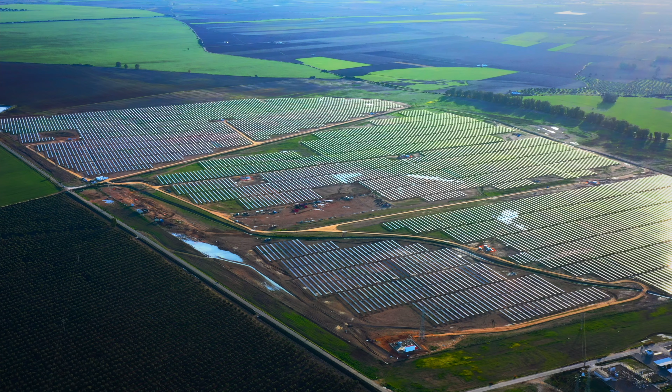Transition to a green, sustainable future is a new trend of the 21st century. We've set the goal in 2030 to reduce greenhouse gas emissions by at least 55%. According to the European Green Deal, Europe aims to become carbon neutral in 2050. We aim to have CO2 emissions peak before 2030 and achieve carbon neutrality before 2060.

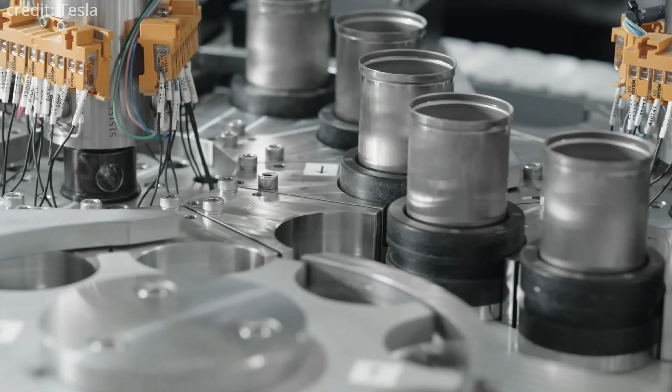The transition to renewable energy will require lots of different metals. The pressure on the mining industry will multiply. And Sweden, as a leader in mining in Europe, takes steps to make the industry more efficient.

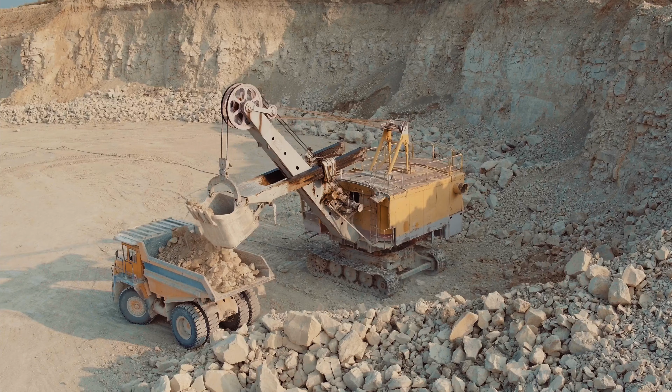The mining industry needs to be more productive, and we are outlining an organization that can help to test and develop new mining-related technologies. Mats Johansson is the leader of the mining development project called SMIG. The project is financed by the Swedish government agency Vinnova, through PIIA and Swedish Mining Innovation and mining-related companies, aiming to increase mining productivity and safety.

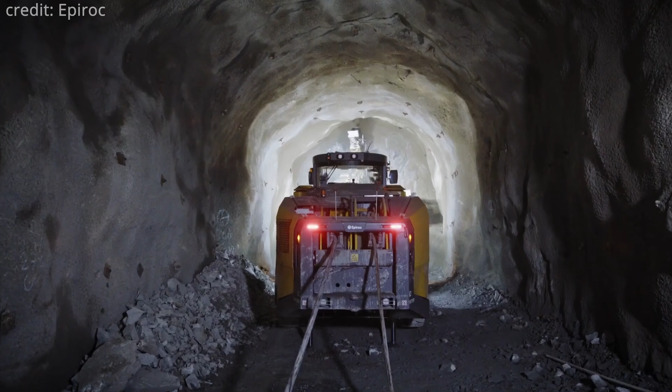This partnership is profitable for all actors in the industry. The universities get access to resources to speed up their research. SMEs can commercialize innovations easier. OEM suppliers can easier get new solutions to the market. And mining companies can early utilize innovations in order to achieve a fully automated mining operation.

This collaboration reduces risks and testing costs, and the Swedish government potentially gets more taxes and a more efficient industry with new jobs. Founded in 2019, the SMIG project has already helped several mining-related companies, IT companies, and universities. And we have also studied how the project can support various players to work together based on several use cases.

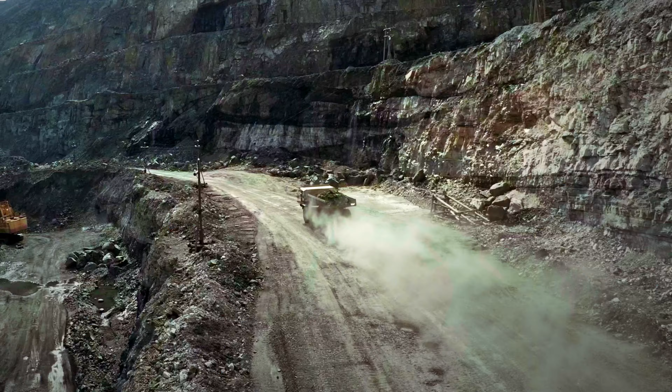Thanks to its large reserves of natural resources and world-class innovation policy, Sweden is a world leader in the mining industry. But the development and testing of new technologies can be a difficult task, even in Sweden, especially for small companies and academic teams. If you want to be a supplier to the mining industry, your customers need to know that your technology is actually working.

And to be able to do that, you need to test and demonstrate that technology. But if you are a smaller actor, like an SME, an academic team, or an actor completely new to mining, you have a hard time getting access to operational sites.

One of the goals of the SMIG project was to analyze the potential of a central test and demo organization and determine the role it can play as a testing facilitator to accelerate innovation in the industry.

We have mapped over 150 actors related to test and demo in Sweden. And this decentralized network of different actors makes it really hard for smaller and new players to navigate the infrastructure for test and demo to find the best suitable solution for the TRL acceleration needed for their innovation.

This is why SMIG as an organization is so important as a single point of contact for various actors, simplifying the complete processes for test and demo.

The next step was to understand how the project would get financing. Factors of risk and success were analyzed, and different benchmark cases were studied. What we have learned is that SMIG and similar organizations have a really hard time operating solely on a commercial basis, because these test sites and also the actors that need to perform the tests have very small budgets.

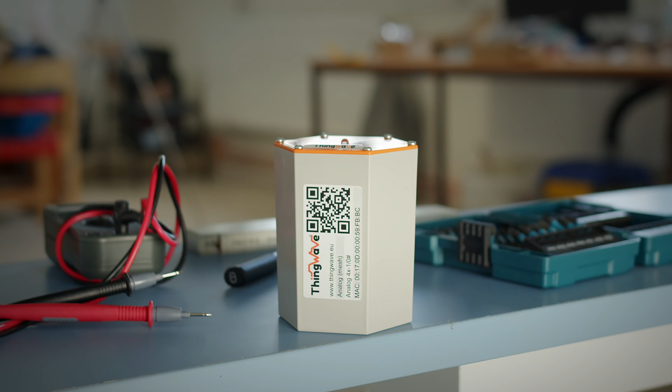It's based on IoT solutions, where we put very small and low-cost wireless devices with different types of sensors, and then we can measure anomalies and alert the mining companies about pending danger.

Since we work with sensors, we need access to real mines in order to do field tests. Before SMIG, we had to run around and speak with different mining companies, but during the SMIG project we got much easier access and could start doing a lot more field testing to test our new technologies.

ThingWave has been leading the use case digitalized ground support, aiming to develop new solutions for ground support monitoring. Together with data analytics from Uppsala University and experts in rock mechanics from Boliden AB, the ThingWave team has improved its technologies and measurement performance.

In this collaboration, we managed to create a couple of different results. One result was regarding fallen ground detection, which we worked on together with Uppsala University. We sent them data that we collected together with Boliden in the Kristineberg mine, and they were able to write algorithms that can detect even small events happening close by smart rock bolts. This is one important result from the use case.

Another result is that now we can detect different properties from rock bolts, including strain and elongation, breakage, and microseismic activity. We also worked a lot on data integration.

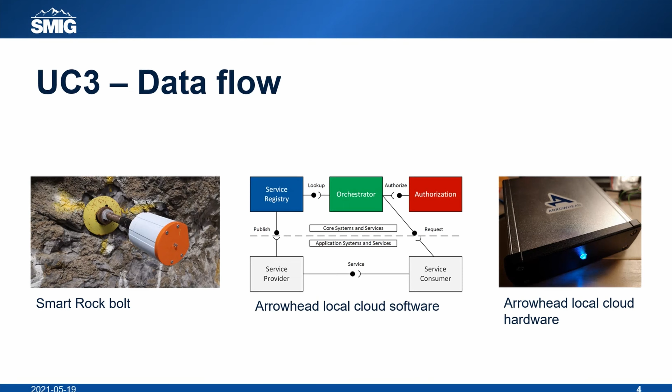We created software systems for the Arrowhead framework, where we can both send and receive sensor data using an Arrowhead local cloud. The SMIG project has helped us get quick and easy access to mines so we can perform field testing.

Which for us is very important since we work with hardware. We were also able to meet new people and companies that we can work with, and it's been a great pleasure to work with SMIG with all these great people.

New sensors and technologies generate data, and it must be handled by existing industrial systems. To achieve information exchange between participants, Benerit was invited to the SMIG project.

Hello, my name is Hans Forsberg. I work at Benerit, and have been working there for about 20 years. The company is stationed in Luleå and has about 35 employees, working mainly with software development.

Benerit is a company that works with other companies, and SMIG was a great opportunity to get new companies to work with and help them with integration problems.

In the SMIG project, Benerit worked with the Arrowhead framework, an integration platform that simplifies information exchange processes. The company also used its software, Arrowhead Test Tool, to verify each integration.

Together with use case 3, we actually did a proof of concept where we showed how the information from the rock bolts has been integrated into Benerit's test tool.

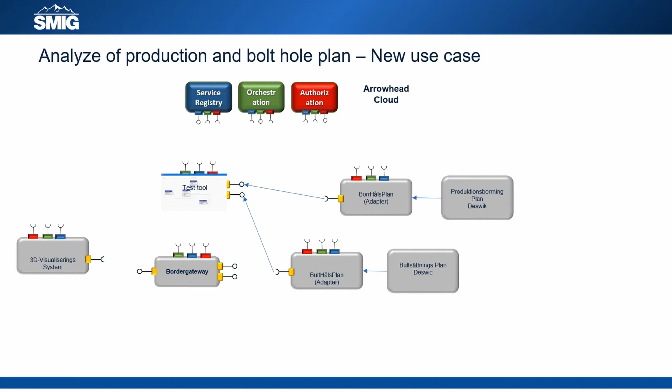The other achievement for us is that we actually have the opportunity to work with our test tool, which is a platform for verifying system of systems.

I'm very grateful for the collaboration in the project, and I think we have achieved a lot of things working with other partners, and hopefully we will continue to work with these partners after this project.

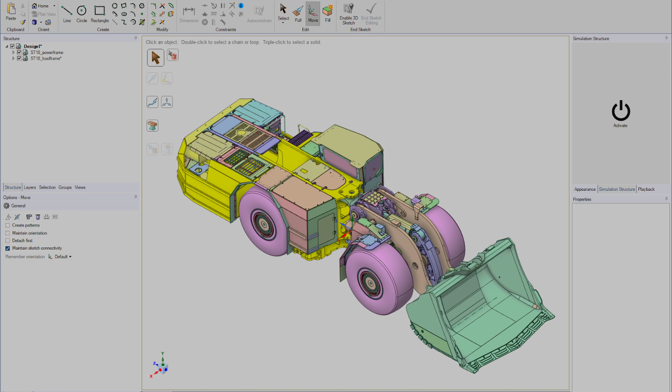Underground mining is a challenging process, and it can be dangerous for workers. To make the industry safer, mining companies are planning to reduce the amount of underground personnel, including drivers of the vehicles. Algoryx Simulation, a participant of the SMIG project, works towards the goal of making the underground fleet fully autonomous. My name is Martin, and I work as an R&D engineer at Algoryx Simulation here in beautiful Umeå.

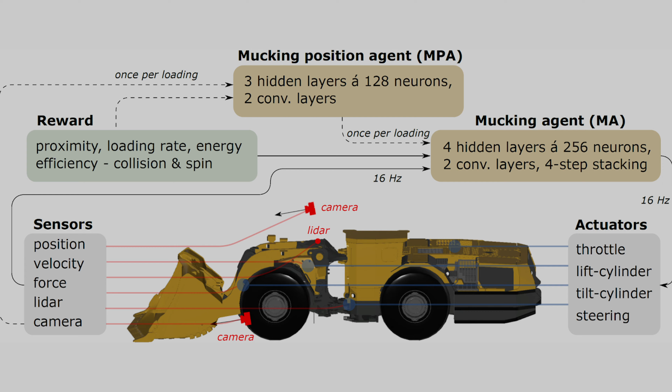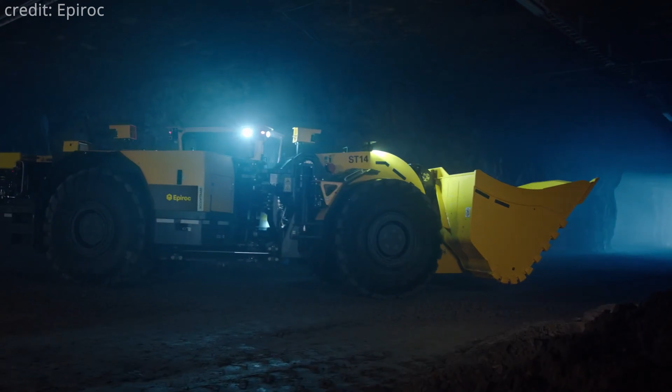Developing autonomous systems and training them using simulations will be a big part of the future. Our simulations can be used to train machine learning algorithms, but we require help from other companies to actually implement this on real vehicles and do the verification and testing. The SMIG project has given us that opportunity to work with companies who work with real vehicles. During the project, the Algoryx team intended to work with Boliden and Epiroc to develop machine learning algorithms, train them into a simulation, and apply this technology in a real mining vehicle.

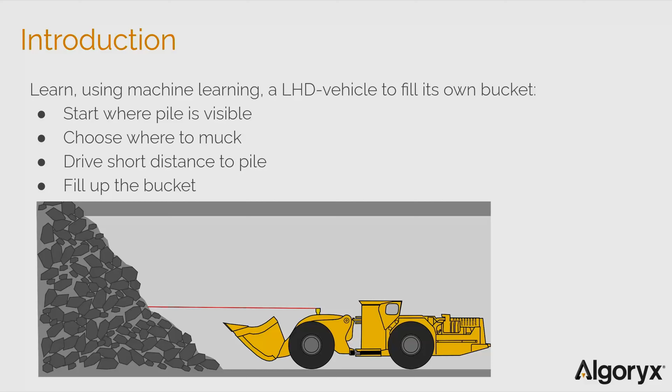But because of the pandemic situation, we had to concentrate our work on the software part. We were able to make a proof of concept implementation of a machine learning algorithm on a wheel loader loading cycle, which is the main result of our part in the project. We have also developed a framework and a workflow for continuing and developing these machine learning algorithms for other vehicles as well and other applications. So that's what we hope to do in the future.

The SMIG project has allowed us to further understand mining operations and vehicles and allowed us to work with great companies. It has also been a way of getting to know the mining industry better, and also getting to know what it's like to work in a big project like this with many different participants, experts in their own areas, all contributing something. It's been a great experience.

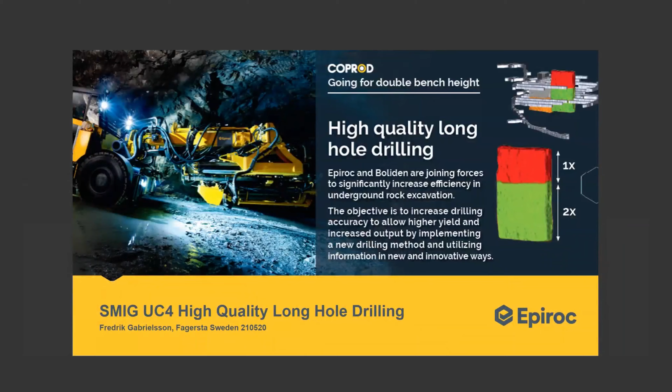To fulfill the demand for metals and minerals, the mining industry has to become more efficient. And the high-quality long-hole drilling use case has already made a significant leap towards that goal. My name is Fredrik Gabrielsson. I represent Epiroc, the Tools and Attachment Division, where I hold the position as Marketing Manager Digitalization. Our headquarters is based in Fagersta, which is in the heart of Bergslagen, the cradle of Swedish industry, and also home to some of the oldest mines in Sweden.

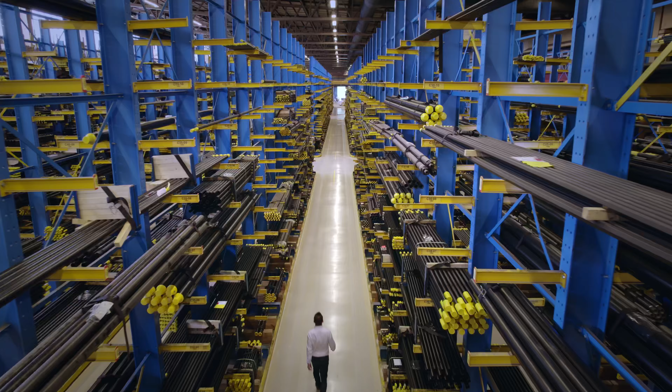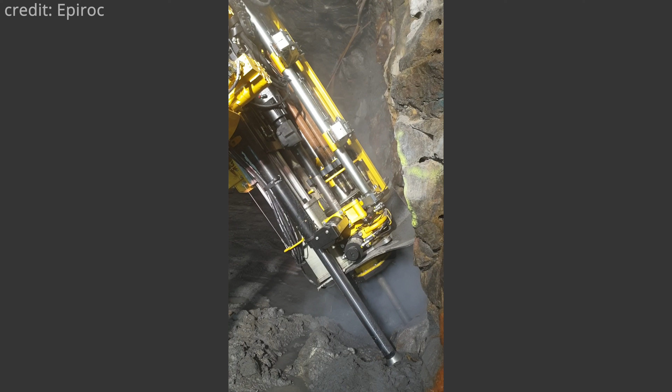I was responsible for the use case high-quality long-hole drilling, and this use case was executed together with Boliden. The objective was to significantly increase bench height in a mine, to get a lot more material out from each blast. During the SMIG project, Epiroc developed a brand new technology and equipment. The mining company, Boliden AB, provided test facilities and operators to run the equipment, and BnearIT assisted with the Arrowhead framework.

The SMIG project presented a common objective to make it easier for several functions within the same division, but also several functions between divisions. On top of that, we had a customer that helped define the goal and present true value in what we were trying to achieve.

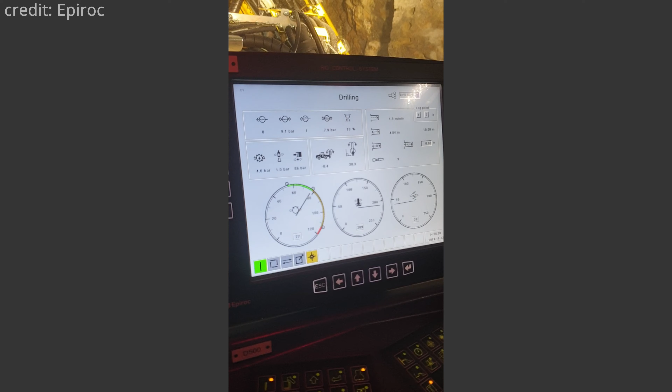Epiroc managed to develop CoProd Underground, a new mining technology with a 50% faster penetration rate compared to the conventional tube drilling system, with incredible accuracy. This technology will nearly double the amount of material in one blast.

To me, SMIG is a forum and a platform where several actors are presented to each other and work together, sharing knowledge, information, and in some cases even resources to move forward. It's been a great experience participating in the SMIG project, not only doing things in a new way, and not only because it was the first time I had full control and access to the data I need in my daily work, but also due to partnerships and collaborations with other companies and stakeholders participating in the project.

New technologies are often developed in academic teams. Uppsala University, ranked among the world's best research universities, participates in various development projects, including SMIG. My name is Monika Ivandic. I'm a geophysicist, and I work here at the Department of Earth Sciences at Uppsala University as a researcher.

In the SMIG project we are currently working on, we are testing the seismic while drilling technology. We are attempting to bring it to a more automated level, as well as testing in a real environment our numerically verified method for monitoring drill bit trajectory. It's very difficult to find a test site where a drilling process is happening so that we could use drilling noise as our seismic source. It's usually difficult to convince companies to collect data during their drilling processes for the benefit of research. So SMIG has allowed that, and it was a fantastic thing.

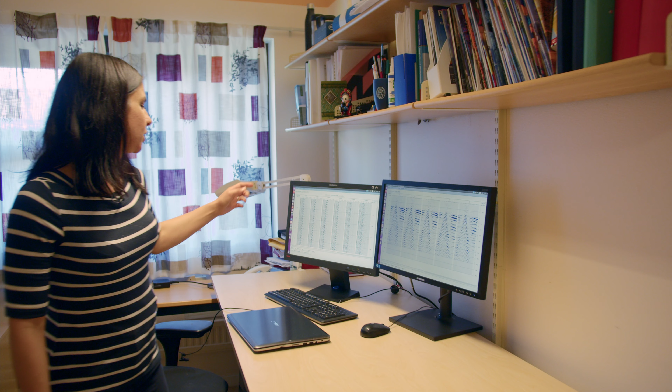I will show you some of the instruments that we used in the SMIG project. These are the wireless units that we use in the field. They measure seismic activity. These are the images that we get first when we collect data.

Then we apply different processing workflows to get something that looks more like conventional seismics and can be used further for interpretation. In this use case, we collaborated with Epiroc rock drills, and it was a great collaboration, and I think both sides benefited from it.

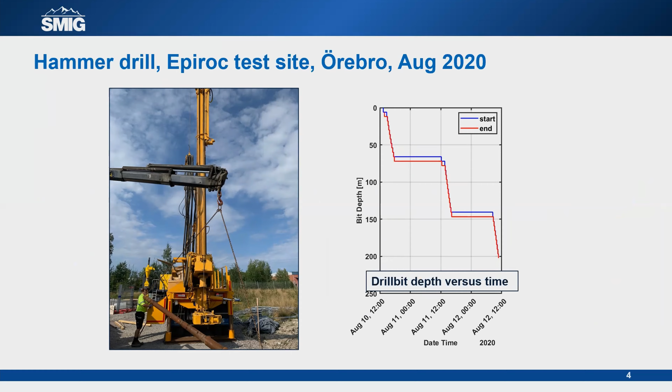For the test site, we used the test site near the Epiroc factory in Örebro. This test site was basically meant to be used for testing different drilling technologies, so it was excellent for our method as well. In August 2020, we did a field test where during the drilling we laid out the instrumentation and collected very good data.

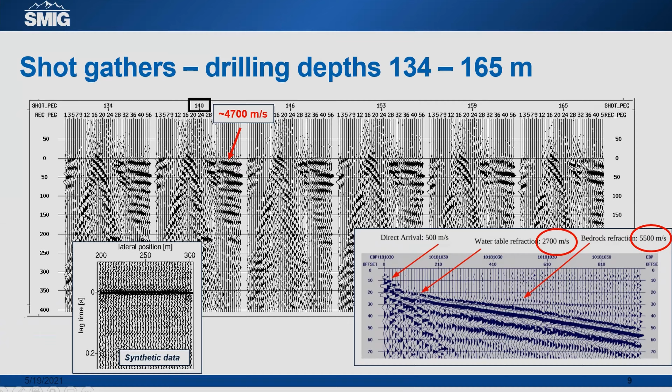The data from geophones matched the data from the active seismic study and the synthetic modeling results, and they'll be further used to improve the technology. During the project, the seismic imaging while drilling method has produced promising results, and the work on the study will continue.

SMIG for me personally is an excellent experience where I had a chance to work closely with industry, with companies, to learn about the problems they deal with and how they solve them, as well as a fantastic experience of developing our own numerically verified method in a real test environment.

COVID-19 has changed the life of everyone. Due to the pandemic restrictions, it became impossible to work the way people are used to.

The SMIG project was also affected by the COVID lockdown. COVID has affected everything in most of our lives. It did create some challenges. We were hit quite hard from COVID. Due to the COVID situation, our field work was delayed. The COVID pandemic has certainly affected our possibilities to meet and also to utilize the testing sites.

In order to get real data, we need access to real mines. During the outbreak of the pandemic, every mine basically in the world closed access to visitors. And we have been working from home for more than a year.

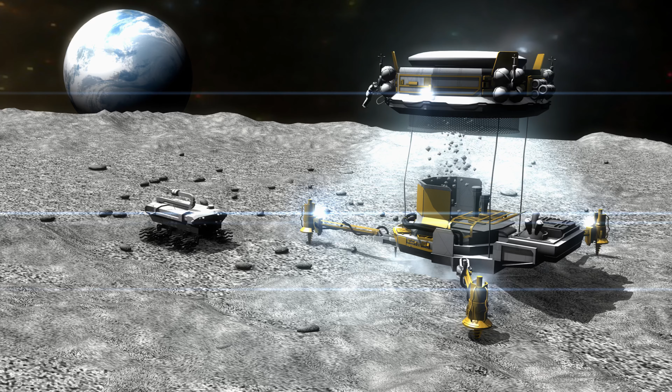Simulations will play a big part in both monitoring vehicles with digital twins. It will be used to train machine learning algorithms. And I think it's also a great opportunity to make mining possible in places other than Earth. You can simulate a mining facility on other planets or asteroids and do those kinds of developments before you actually go there.

After 2 years of work, the SMIG project has reached its end. It's time to sum up the results and to think about the future.

It was absolutely important for us to be in this project. SMIG has meant a lot for ThingWave. Participating in the SMIG project was very beneficial for Uppsala University. It's been a great experience participating in the SMIG project. I'm very grateful for the collaboration in the project, and I think that we have achieved a lot of things.

Working with other partners, we have managed to grow in large part thanks to SMIG. SMIG gave us access to mines and also a lot of very competent people. We've learned a lot from this project.

I think the SMIG project will continue. We would like to have a continuation of SMIG because for us it's been incredibly beneficial. Hopefully we will continue to work after this project with these partners. We hope that we will be able to do those things that we were not able to do in this project because of COVID. There is still a lot to develop.

We would like to advance our methodology and bring it to a more automated level. We had a lot of really good ideas that turned out well in the end, so we really want to continue with those ideas and see how we can take them to the market.

I think it will be very successful, especially if it finds a format where we can run proof of concept at the mine site, for example, and do it where it's needed, and then make it scalable afterwards. Then I think it will be very attractive to the mining industry.